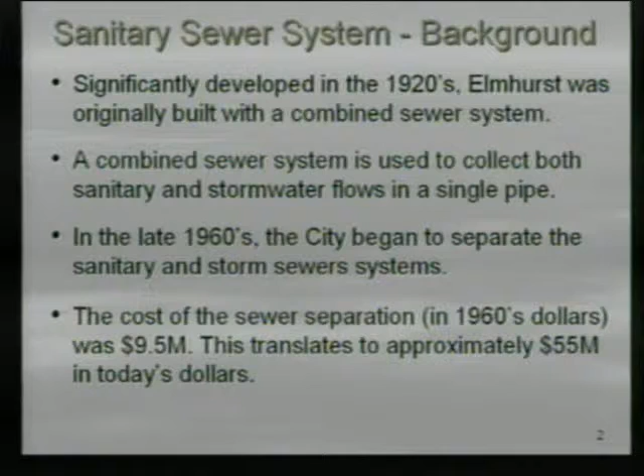Elmhurst was mostly developed back in the 1920s and was originally built with a combined sewer system, where all the sanitary flow and all the storm flow goes to the same single pipe. That's how things were constructed back then. In the late 1960s, the Clean Water Act came into being, and the real push to clean up streams and waterways started, and it became very obvious that combined sewers were problematic as they carried waste to the streams. The sewer separation the city went through in the 1960s cost approximately $9.5 million, which would be significantly more today, in today's dollars.

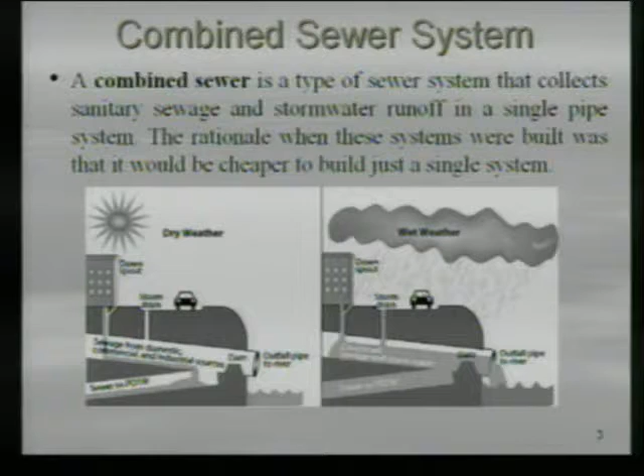Here's a picture of a combined sewer system. The picture on the left shows the system in normal flow, dry weather condition, where all the sewage from buildings in town is handled by that sewer and makes it to the water treatment plant. But when you get wet weather and the storm drains and downspouts kick in, it's too much flow for the treatment plant to handle, so there's an outfall, shown schematically here, that allows it to go straight to the creek. This single system was much cheaper to build, and that's probably what drove it in the day.

Currently, the city has a sanitary sewer system, which carries the sanitary waste away from homes and buildings, eventually to a treatment plant — the city's own municipal treatment plant. In the sketch here, you see the sanitary sewer out in the street.

It may be just one point, I'm not sure if I can point to that. This line right here is the sewer lateral — you'll hear us talk about that. That's the pipe that connects your house to the city sanitary sewer. In Elmhurst, as in most communities, the city's responsibility for maintenance ends right at the joint where your lateral comes into the city's main. The pipe from the main back to your house is the homeowner's responsibility — the homeowner owns that piece of pipe.

I sort of use the analogy that the city has a roadway network, but you've got to get your car from the garage out to the street. You have a driveway — that's sort of that connection, similar to this.

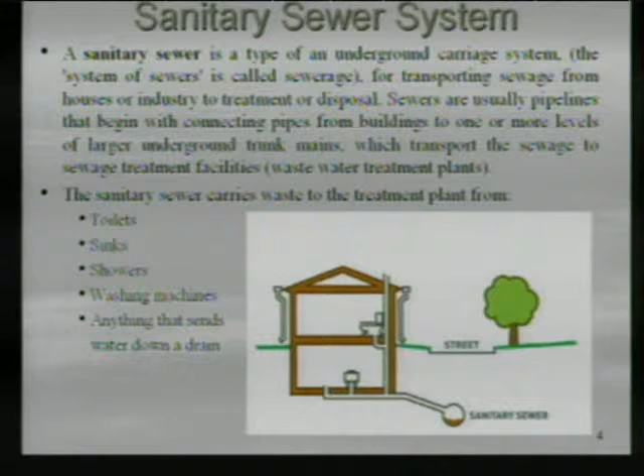A general schematic of a sanitary sewer system follows naturally. There's a small service which leaves your house and normally goes to an 8-inch sewer in the street, which may go to a larger sewer, which at some point will probably go through a lift station. Everything's flowing by gravity in the sanitary sewer system, but at some point it gets below the treatment plant and has to be lifted back up so it can continue by gravity. In this case, it goes to an interceptor and eventually to the treatment plant.

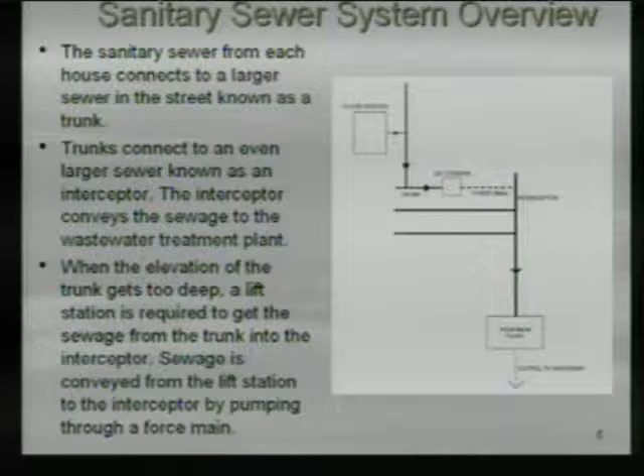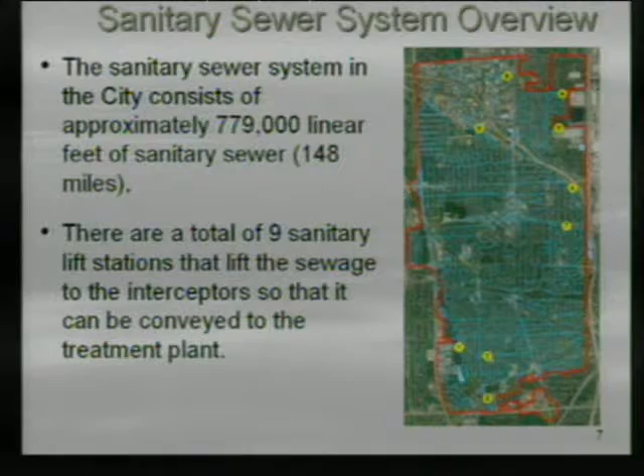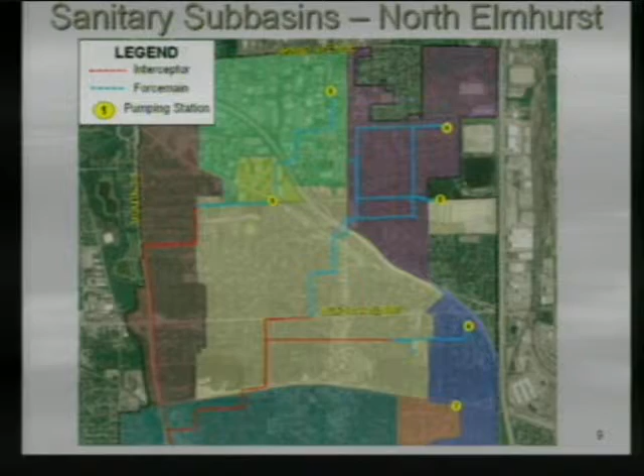Within the city, there are subbasins which drain to these different lift stations. This doesn't really identify which goes to which, but it's broken up such that certain areas go to different lift stations, and they all then go to a force main, which lifts it up one more time, and it's usually then taken by gravity to the treatment plant. These are the subbasins in North Elmhurst, and these are the subbasins in South Elmhurst.

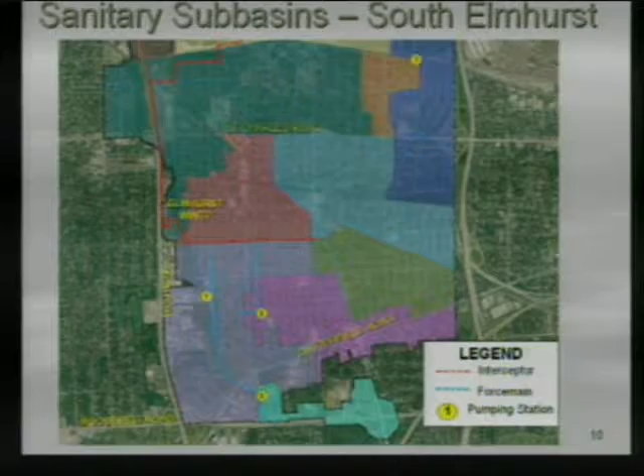With the lift stations being so far flung, the city has to keep a pulse on what's going on at each of them. To do that, the city uses what's called a Supervisory Control and Data Acquisition System, SCADA. It's located at every lift station and sends data back in a constant stream to the wastewater treatment plant, where an operator is monitoring the screens and looking for problems.

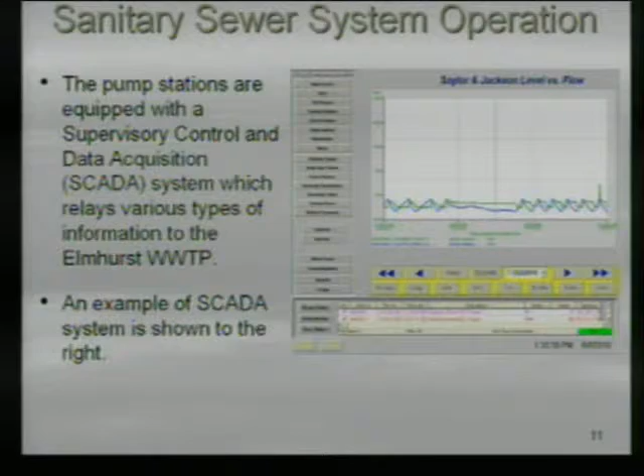Under normal operating conditions, this is what the SCADA will show: the wet well elevation, number of pumps operating, station flow, pump runtime, generator status, intrusion alarm meaning if the door opens, the PLC, or logic computer, which is running the whole show, and set points for when pumps come on and off, along with what those elevations are. If there's a failure or an alarm at any of the stations, it immediately rings back on this screen at the wastewater treatment plant where the operator is.

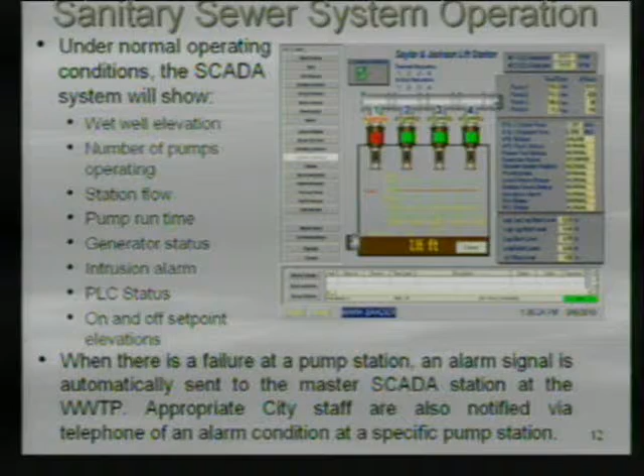Here's an example of when pumps are taken out of service for maintenance or whatever. The operator will see a screen showing them turned off and X'd out as out of service. Other alarms that come in include power failure, generator running, high water, and intrusion, so that we know if something isn't quite right at the lift stations. Again, they're all over the city, so this is the only way to monitor them.

We're going to focus pretty heavily tonight on inflow and infiltration. Probably by now everyone's heard those terms, but we'll go through them again. They're terms used to describe clean water or groundwater that gets into the sanitary sewer system.

As we'll see a little bit later, sanitary sewer systems are designed to carry sanitary flow, not rainwater. So when clear water gets in, it's a problem. The sanitary system is designed for toilets, sinks, bathtubs, and showers, and the clean water that gets in is problematic for the system's capacity.

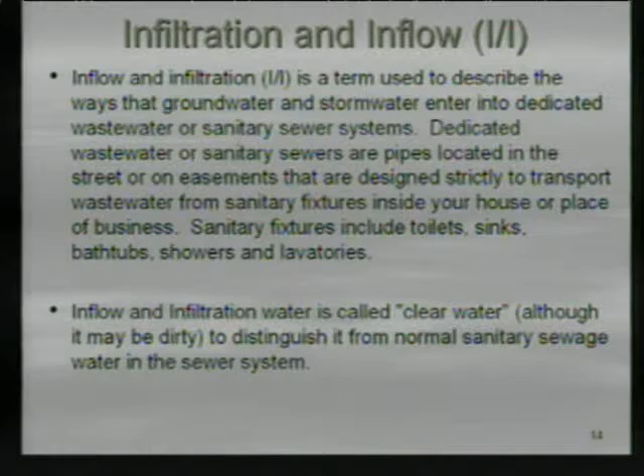Here's the definition of inflow. It's basically water that is flowing into the sanitary sewer system by a connection. It could be a footing drain, could be a roof drain, could be window wells, and it could certainly be sump pumps.

Most of these sources, it's illegal for them to be connected to the system by today's current code. So all of these things could not be draining into the sanitary system in a house that's built today.

Obviously, as the last bullet says, the preferred route is that stormwater is pumped outside and either goes to the storm sewer or gets infiltrated into the ground.

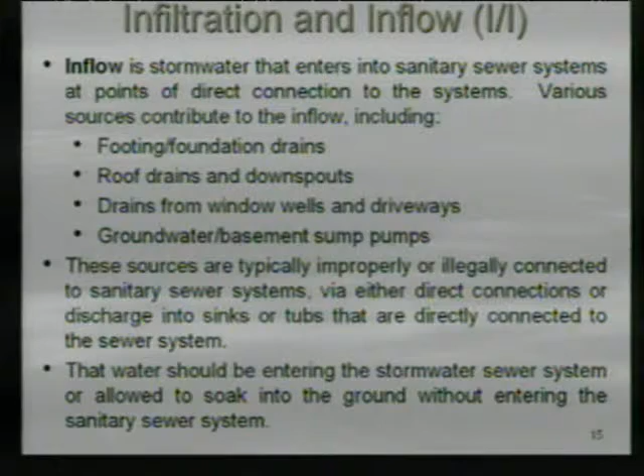Infiltration is water that comes in through cracks and leaks in the sanitary sewer pipes. Again, we have 148 miles, most of that sewer is 6 foot in length pieces. A lot of it is vitrified clay pipe. Some of it is greater than 50 to 80 years old. So there are cracks, there are open joints, and the water will infiltrate in through those cracks and joints.

The bottom bullet says that often sanitary sewer system pipes, along with the lateral pipes attached to houses and businesses, have gone much longer without inspection or repair. The city does TV and maintain its sanitary sewers, which we will see, but very few private lines have ever been inspected or checked, so we don't really know what kind of condition they are in, but they're as old as your house, and if your house is pre-1970, there's a good chance it's clay tile as well.

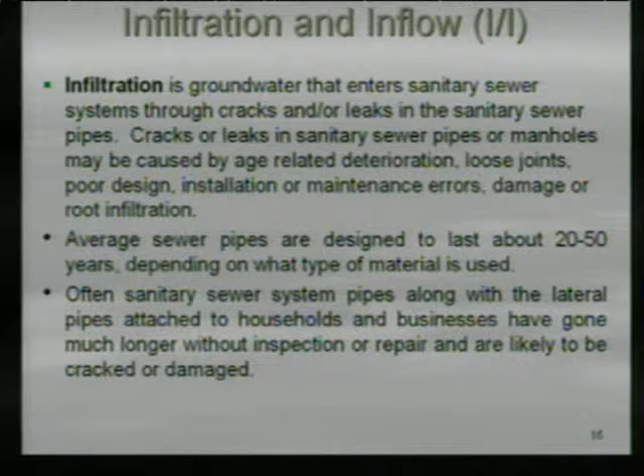Here's a schematic of sources of infiltration and inflow. Starting at the top, you see a roof drain connected. The city doesn't have that problem too much anymore, but here you have a footing drain that is connected directly in, and that is a problem we do have.

I would call that inflow, but some of these other sources of broken sewer -- this is that lateral again that we talked about. You could have a broken piece of pipe on that. You could have an uncapped clean out, not something we see too often, where your pipe comes into the city sewer. Sometimes that connection will leak.

Here you've got just a crack in the city sanitary sewer system. Here's a crack in a manhole. The old lids used to have big holes in them, just like a regular lid. Now we have what's called concealed pick holes, much smaller. Keeps the vast majority of water out.

On the storm side, it could be a cross connection from a storm inlet, or even a cross connection from a storm sewer. We look for those constantly. We would love to find those. We're always checking, and we don't find many. If we find one, we immediately disconnect it, but we don't find too many, unfortunately. That would be a large source of I&I that we could easily remove from the system, but we don't find too many of those.

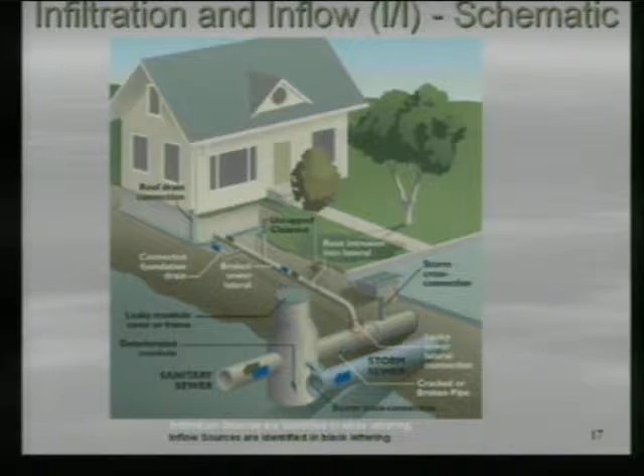When we get in these situations where we have inflow and infiltration, I&I, it causes us problems at the lift stations, because the lift stations are sized to handle sanitary flow, and now we have a lot of clean water coming in.

Here you see -- oops, gosh darn it -- right there is the sanitary lift station located on Saylor. It pumps all the way up Saylor to McKinley, and then it's again been lifted, so now it can go by gravity to the treatment plant.

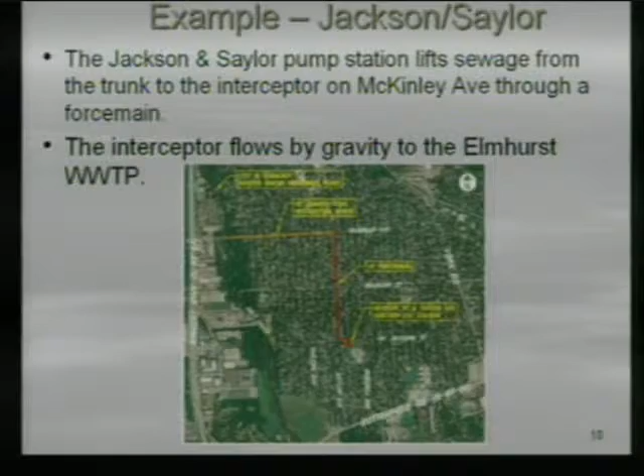In a normal day's flow, when sanitary flow is coming into the wet well, it's kind of like your sump pump, a really huge sump pump. It fills, it fills, it fills, and then it kicks on. Sometimes the pumps keep running if they're timed just right, but basically all day long, every shower, every dishwasher, every washing machine is going into that wet well, and then the pumps kick on and send it up Saylor to the gravity sewer at McKinley, and then it flows onto the treatment plant.

When it starts raining and that infiltration and inflow starts coming in, it comes into that wet well really, really fast. At Jackson and Saylor, we do have a bypass which we can open, and we can pump additional sewage to a storm sewer, which is not an ideal situation, but it's better there than in someone's basement. So we operate that, we send it that way, and that goes through a 24-inch force main that connects to a sewer on Hillside.

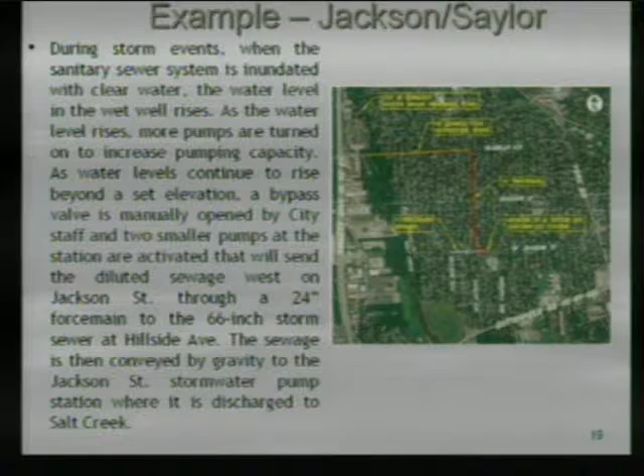So we are able to man that and operate that. We're currently in the process of making those valves, which we currently have to open and shut manually, able to be done remotely. But again, that's what happens when we start getting the rain and we start getting the inflow.

This is something we put on recently. There was some confusion at Saylor and Jackson as to whether the pumps were running in different events, so we decided it would be better to communicate. People were thinking they weren't hearing the pumps, but the pumps at Saylor and Jackson are 20 feet down, submersible pumps in a wet well, so you don't hear them even standing right there. What people do hear is the generator, a large engine. So in this case it looks like the pump-on light is on, but if you were there, you wouldn't really hear anything.

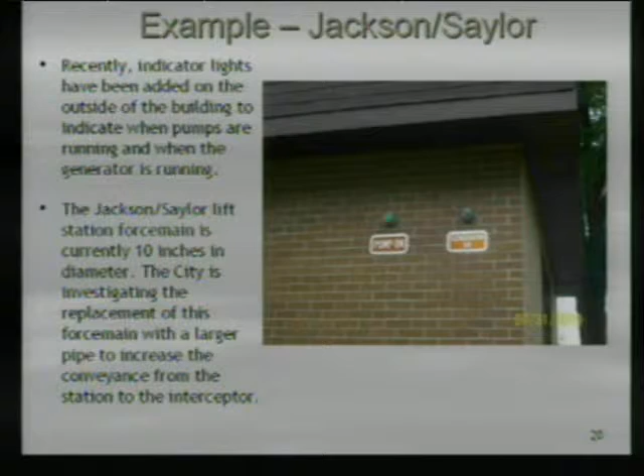This force main goes up to McKinley, and it has been programmed for replacement just for maintenance. We're currently looking at increasing the size to see if we could pump more out of there on a normal basis.

Here's a schematic of a connection of a sanitary sewer. Originally, since the combined sewers were both, when the new separated sewers went in, they laid them as storm sewers because everyone was already tied into the other one. So for 95% of the sewers that went in, the old sewer stayed sanitary, and the new sewer, probably reinforced concrete pipe, became the storm sewer. So these older homes that were connected stayed connected. You can see here you have all your sanitary coming in, your toilets and wash tubs, but you also have a footing drain tied in, so as it starts to rain, you're getting that flow into the sanitary sewer system as well.

The city did go through and do a sump pump disconnect program back in the 90s, where every home in town was visited and required to take their sump pump, if tied into the sanitary, and kick it outside. In addition, we also did downspout disconnects, and every downspout in the city was disconnected. I'm surprised when I drive around other towns how many still have them - house after house just going right into the ground, and all that water is going right to their sanitary system and taxing it.

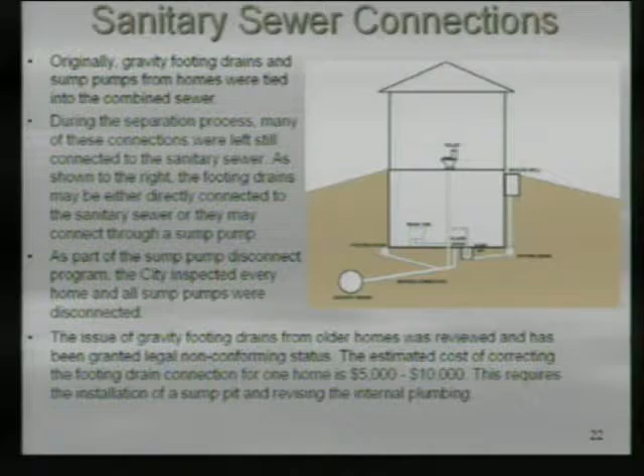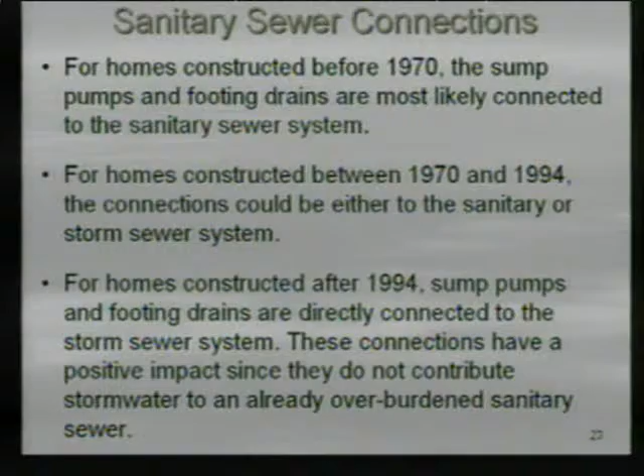For homes constructed within Elmhurst, when you look at the age of homes, those built before approximately 1970 are probably tied to the sanitary system because there were no storm sewers. Between 1970 and 1994, we don't really know for sure which they might have been tied to - it was kind of a period where it wasn't real clear. But we know after 1994, any new home constructed has the sump pump discharging outside and not tied into the sanitary system. We'd point out that homes constructed before 1970 had the sump pump connected to the sanitary at that time, and the footing drains were most likely connected to the sanitary as well.

Elmhurst has gone backwards and said downspouts have to be disconnected, and sump pumps, if you've got one, have to be disconnected from the sanitary sewer. So even if a home was built before 1970, if it had a sump pump originally connected to the combined sewer, now the sanitary, that sump pump will have been disconnected.

But if there's not a sump pump, if it's just a gravity foundation drain, those gravity foundation drains are still in place and connected to the old combined sewer that's now the sanitary, as noted. And that's clearly the largest source of inflow resulting in the problems we're all experiencing. All right, thanks Tom, that's good clarification.

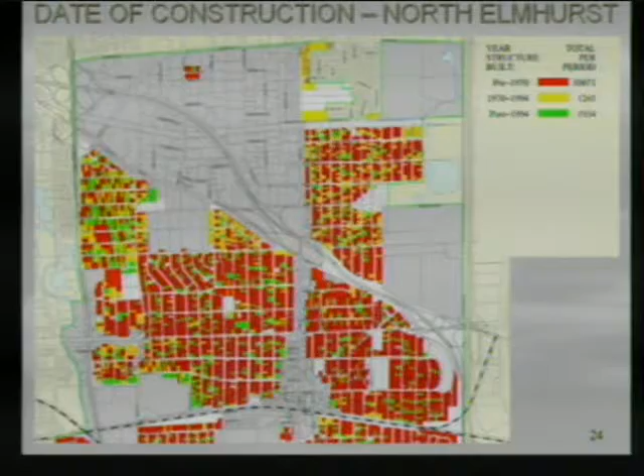Here's a map of those three periods: pre-1970, 70 to 94, and post-1994 homes in town. I've got the south half coming up next. This is the north half of Elmhurst, and you can see there's quite a bit of pre-1970 homes. Those numbers on the right are for the whole town, so the bottom half has the same numbers, but that's roughly 10,000 pre-1970 homes, a large percentage of which probably have gravity footing drains, and that's where the water's all coming from.

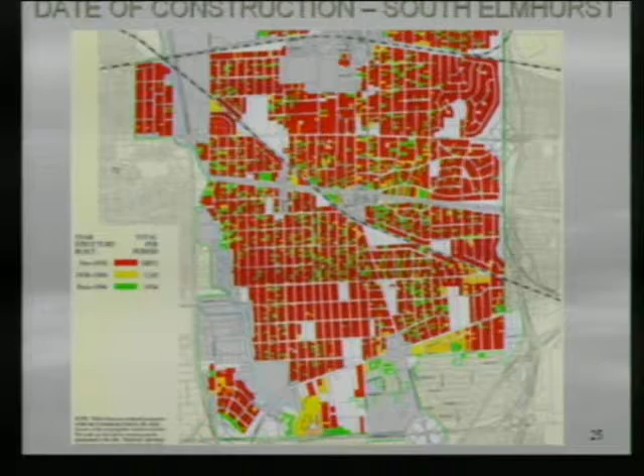That immediately becomes a problem and overtaxes the sewer system, the sanitary system, in a rain event.

Sanitary sewer design is generally based on how many people are going to be using that sanitary sewer. They're designed to convey 100 gallons per day per person, which we call a population equivalent. So depending on how many homes you have, that tells you, if you were building a new subdivision, how large your sewer has to be. They're designed to have a velocity that keeps the speed up to help be self-cleaning. They're vitrified clay or plastic, so they have very low coefficients of friction on the inside.

So here you see an 8-inch sewer will take approximately 500 homes with 3.5 people per house. So an 8-inch sanitary sewer is a large sewer. It's got plenty of capacity.

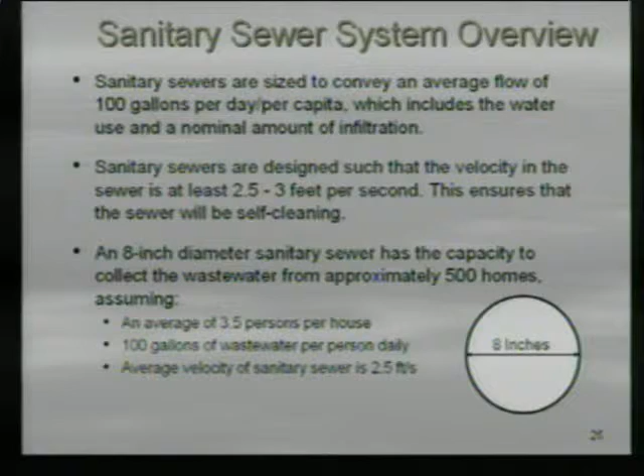The problem is when we don't carry only sanitary and we start carrying clean water. A half horsepower sump pump with a 1.5 inch discharge line will do 60 gallons a minute. If you do the math, it only takes 7 of these pumps to exceed that 8-inch capacity. So if you have a block with 20 or 30 homes and half of them are tied in or somehow connected, then you've got problems.

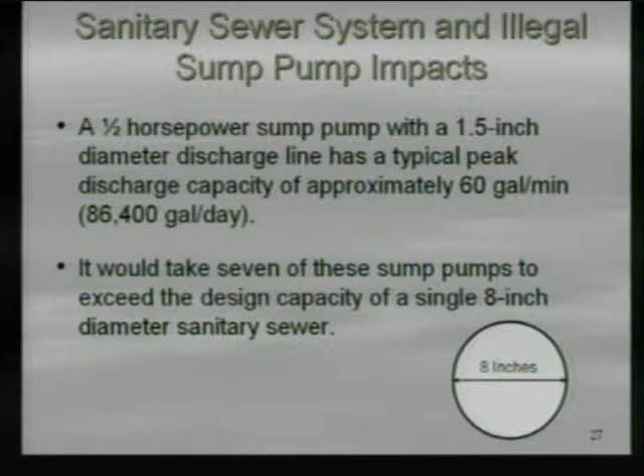When that water gets into the sanitary sewer system, it puts that sanitary sewer under pressure. It creates what we call a hydraulic gradient, a pressure line in that pipe. The science calls it a piezometer, but if you could take a straw and put it in that pipe, you would see how much pressure was in that water. That dirty water would come up that pipe to a certain height, which is the same height it's going up the lateral and up the floor drain into the house. So that pressure in the pipe is what's causing it to go backwards up laterals.

And if you don't have an overhead sewer, then this is the situation we end up with, which we had a lot of this summer.

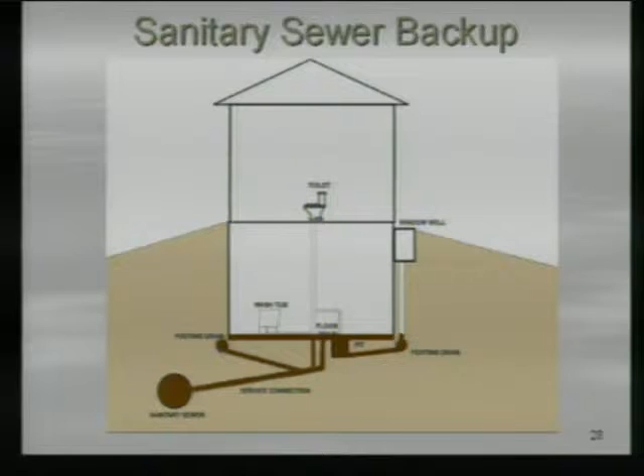The city has taken on numerous projects over the years to reduce I&I on the public portion of the sanitary sewer system. We did sump pump disconnects and downspout disconnects back in the late 80s, early 90s. We utilized smoke testing to identify any area drains, and those were removed. We line our sanitary sewers at about $900,000 a year. We've gone through and did gunite and sealing of all the manholes back in the 90s, and they all got new covers. The city also has the overhead sewer program, which is a very effective program because it's doing two things.

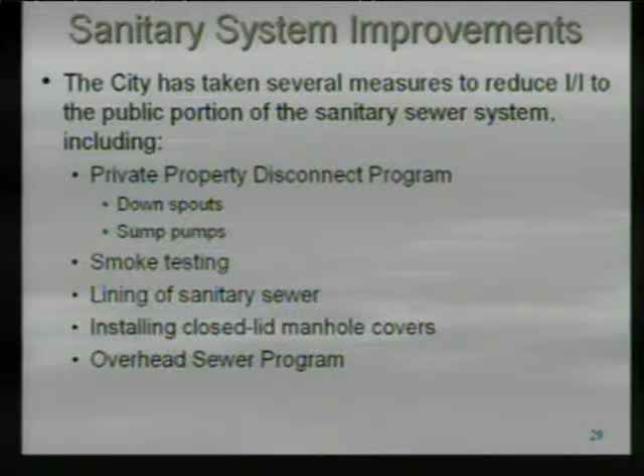It's getting the clean water that's coming from that house out of the sanitary sewer system, and it's not allowing the sanitary sewer to back up into that basement.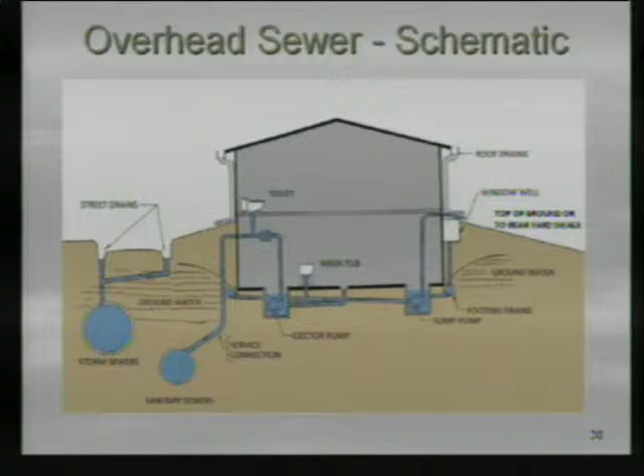This elevation here and the check valve is what protects that flow from coming back up. If this floor drain was connected straight to the sanitary and this goes under pressure, instead of just getting this high, it would have to get up above the street. So that's where the protection comes from, combined with a check valve in the overhead sewer protection system.

A little history: the overhead sewer system program was created in 1997 with a $3,000 reimbursement, which has been upped recently by the city council to $5,000. We only did 15 prior to 2009. In 2009 we did 14. We were budgeting, I think, $15,000 a year.

Then in January through May of this year, we did 11, and the city council had increased that budget to $50,000. After the June and July events, the city council bumped that up another $450,000. We have almost 100 on the list. 38 have applied for funding. We've processed 12 of those, and there's another 61 going through the process.

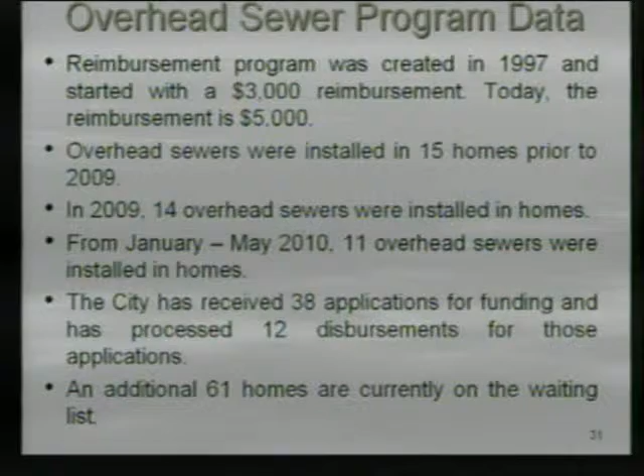Again, this is just to differentiate generally. This is a slide on the City of Elmhurst's shared overhead sewer installation program, where the city pays half the cost, originally not to exceed a total cost of $6,000, half the cost being $3,000. Now half the cost not to exceed a $10,000 project cost, or a $5,000 city expenditure.

The city, since I think it was 1993, clearly has a code that requires overhead sewers to be installed with new homes. So homes built after 1993 have an overhead sewer system, but they were all paid for by the owner of that house, originally paid for by the builder, and then the owner paid for it. So there are a lot of overhead sewers in the city that are protected, but the city's program of financial support is limited to what's shown on that slide.

There's a lot more interest recently than in the past, but there was a lot of interest even prior to that. I actually got an update today on the program, and our average reimbursement right now is $4,100. So that's what we're running at.

Another large program the city does, and has been doing for 20 years, is sanitary sewer lining. As I said earlier, sanitary sewer pipes are largely vitrified clay pipe, the same material as that orange pot you have flowers out in your garden. So it does crack, and it could eventually collapse.

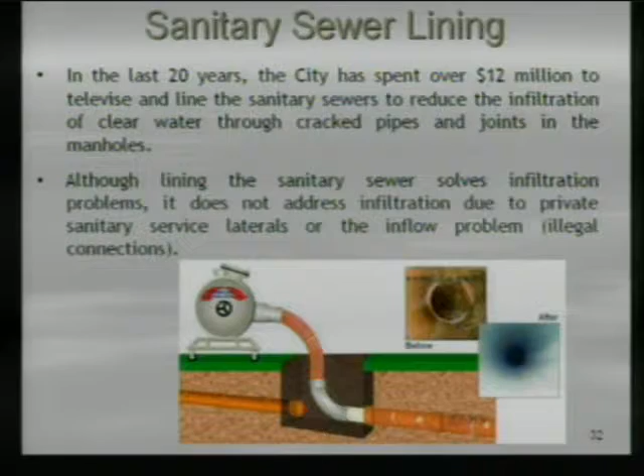You can't really see it, but I have a couple of little samples. I can do a little show and tell for the council, but this is what the bag looks like when it goes in. It gets inverted into the line, and eventually once it's cured, it's watertight and it's got structural strength, so we're gaining two ways: we're reinforcing the strength of the sewer, and we're eliminating infiltration through the cracks and joints, because this goes from manhole to manhole.

So normally you'd have a joint every 4 to 6 feet, but with this you have no joints from manhole to manhole. Any direct inflow pipe would be identified with that program, because pipes connected to the main line have to be cut open, and if they're not cut open, they're disconnected. So all of the sewers that have been slip-lined, the city is quite reasonably sure all inflow connections have been disconnected, if they weren't first found and identified and corrected with the smoke testing program.

It's a good point, Tom, because normally after that bag goes in and once it's cured, if it's happened on your street, you get a notice that says you won't be able to use your toilets for a little while. We actually have to come back and cut out a cookie, where when the bag gets pushed in, you can kind of see a little indentation where it's pushed against a connection, so they cut that out.

But before we even get that far, the line is TV'd. Any potential collapses or partial collapses that would keep the liner from going in are dug up and fixed. That's what we call a point repair. Then the liner goes in, it gets cured, and when it's all done, the laterals get connected.

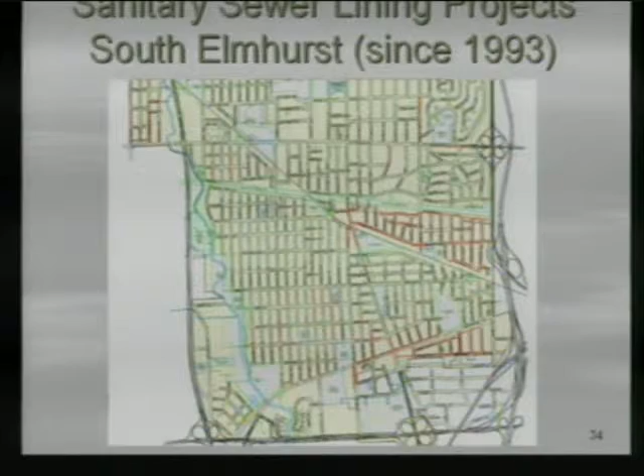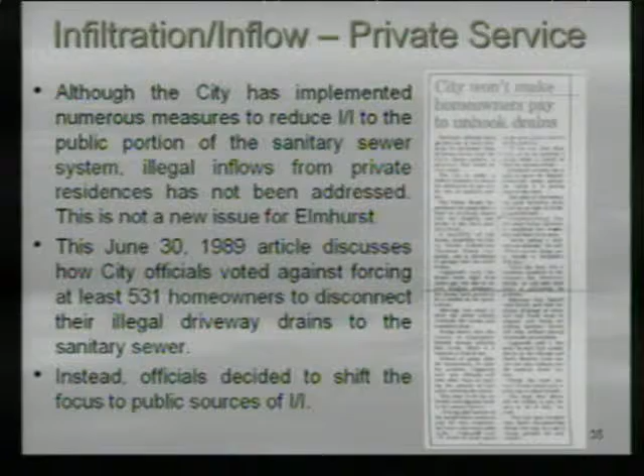Here is an article from 1989. The city has done a lot to reduce I&I on the public side of the infrastructure and continues to do that. In the aftermath of the '87 flood, there were discussions about whether we should force people to disconnect their driveway drains and footing drains, and as you can see here, the city council voted to make those legal non-conforming and left those in place.

Then in 1989, the city approved $500,000 to repair some of the cross connections that existed between the sanitary and storm sewer. At the same meeting, it came up again about disconnecting residential driveway drains, those downslope driveways which obviously bring clean water right into the sanitary system. Again, it was decided they were going to be grandfathered in, so it wasn't removed at the time.

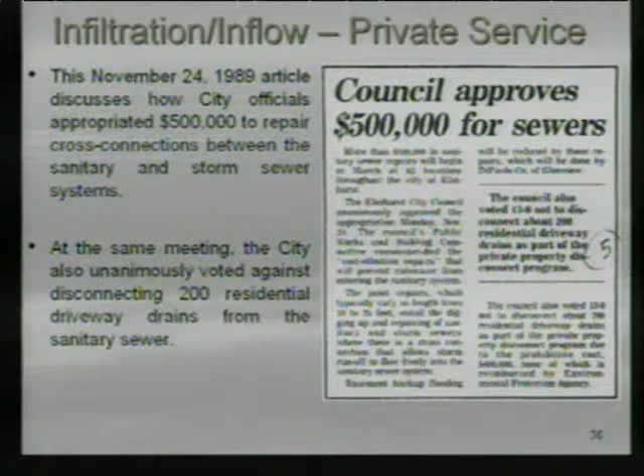So we've got a combination of public-private infrastructure that makes up the whole sanitary sewer system. The big problem is I&I, and the city's made big strides on reducing I&I on the public side. How we best do that going forward on the private side is something we expect would be analyzed, with alternatives put forward, coming out of the comprehensive plan.

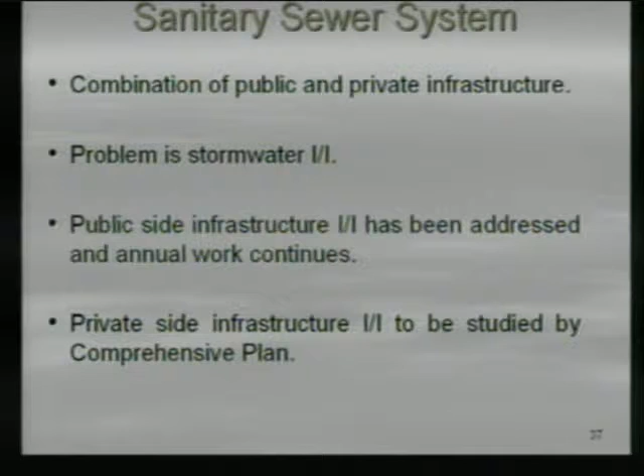Appreciate your education on the sanitary system. Not the fun system, but it is what it is, right? So, any questions or discussion?

Alderman Mulliner. Excellent job, but I have a whole series of questions. So let's start, I probably got about 10 or 15 questions I kind of want to go through.

Slide 5, you talked about this, we've talked about it a number of times, the connections with the foundation drains, indicating that there's a significant percent of the water that goes into the sanitary sewers from that. Do we have any idea what percent of water goes into that?

Those foundation drains, I'm assuming those are the traditional foundation tiles. Are all of those still intact, or have most of those collapsed? Is there any way to know that? Well, if you're having real seepage problems, you may have a collapse. If you're not having problems, it's probably still working. Those tiles that are laid were generally laid in some stone bed, so even if a pipe is collapsed or broken, the water may still be able to move through the stone and get out eventually.

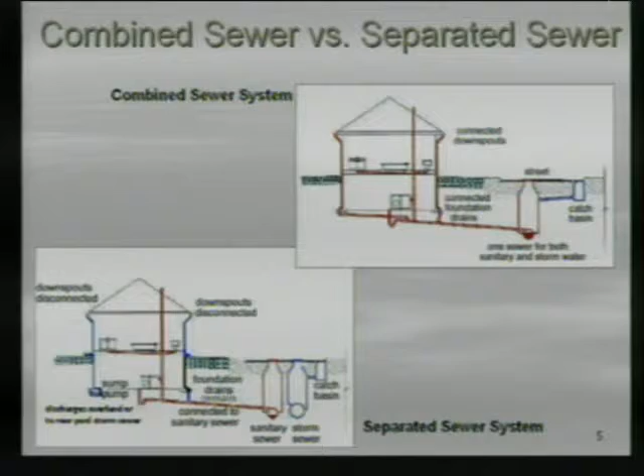So if you're looking for one of the solutions, it's to disconnect these and connect them to the other sewer system. That would be a logical thing to do in order to eliminate a lot of the water going into the system. Correct.

On slide 8, this goes to the pumping stations. How often are those backup generators run?

Okay, the diesel fuel, I assume, is changed out periodically or run to the point where it's run down? What about the one that's at...

McMaster-Carr? Do we maintain that? I know it's maintained by them, but do we actually check to make sure that they're doing what they're supposed to with that one, or do we just assume that they're doing it?

I think that's totally theirs, but it also only services their campus. Okay, so if they don't do it right, they have the problem, it's not ours. It used to be the city's prior to Romans Road being vacated and all that, but once they took over everything, they got that too.

Okay, you've got a couple of them that are indicated here with portable generators. Plans to upgrade those or put regular generators at each one of those? Do you have any long-term plans to replace the generators at those? I don't believe we have any plans right now, but again, could be something looked at in the comprehensive plan going forward.

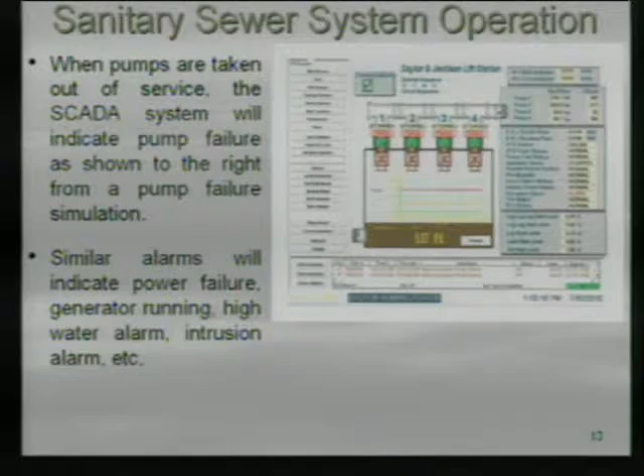I'm curious as to when you do the maintenance on them, I'm assuming that you don't take all of the pumps out at one of the lift stations at one time. You only take one at a time out. It would be sequenced depending on what had to happen, right?

Okay, are all the lift stations similar to the one lift station that we've talked a lot about where they have 4 pumps in them, or is each one slightly different? I would say each one's slightly different. They're different sizes for the amount of flow that's coming into them and how far they're pumping it, how high they're pumping it, so they're all different.

On slide 17, one of the comments that you made was that there's a number of these crossovers between the storm sewer system and the sanitary sewer system, and you said when you find them, we take them out. We don't know where any of the remaining ones are. We're just finding them as we go along.

Well, that's what I was saying. We haven't really found any. We always hope, we would almost like to find them because then you've got a real source of inflow. But over the years, they've been bumped into.

The sewers have been TV'd. As Tom said, when we TV'd a sanitary sewer, we see every pipe coming into it, and we've done 35 miles, and I don't know that we've bumped into hardly any.

Yeah, and initially, after the sewers were separated, the city went through a program, before my time in this capacity and even in public works, but as an engineer, the city was smoke testing the entire sanitary sewer system, checking for any downspouts that were still connected from houses, and then checking and seeing any smoke coming out of a stormwater inlet curb connection at the street, that indicated that inlet was connected to the sanitary, or the downspout was still connected to the sanitary, and then that appropriate disconnection was made, be it on the private property side of a downspout or any direct drain connected to the sanitary.

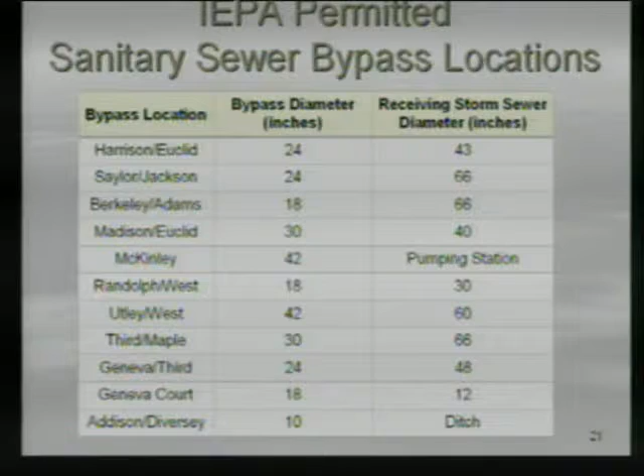Hard to say exactly, but take what happened on July 23rd - it was pumping down to Harrison, which was already underwater. Was it making it worse? Could you measure how much higher or lower it would have been without that? It's hard to say, but all that water was potentially heading to basements. So as bad as that is, it's not as bad as the other choice. It taxes the storm sewer in a more normal situation, but in all these cases we're trying to get sanitary and storm separated. It's better to take it out of the sanitary, even though you may have a negative impact on the storm.

Okay, so we're back to the I&I issue is what we're back to. We've got to get the water out of the sanitary sewer system.

One of the other questions I have relates to what we just saw - you passed around the sewer lining, and I ask this question all the time because I think this is one of the things we keep missing. I think the drains around the basements are probably one of the issues, but I still think the laterals are another big issue. There's a lot of houses out there with old clay pipe that are collapsing or have roots going into them. I'm sure most people with a house in town can tell you how many times they've had their sewer rooted out to get it cleaned, and it's primarily roots getting into it.

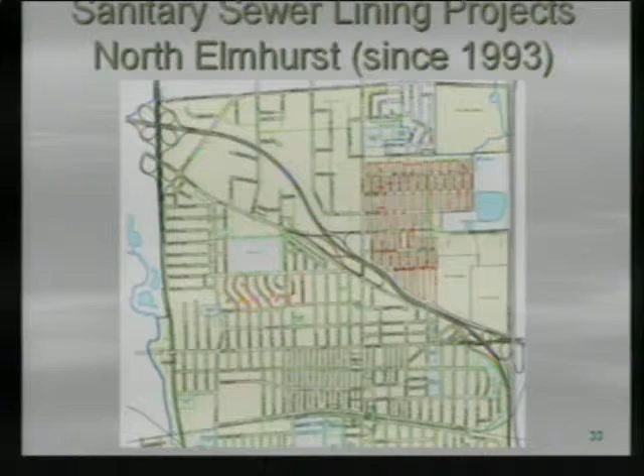I wanted to dovetail off of that because I thought we had at least something in place for the laterals. My one question is on slide 33, and not particularly about that slide, but the sanitary sewer lining. Obviously the northeast section has already been completed, and other sections within town have also been completed. Do we have any data prior to and after the lining has been done for each of those impacted sanitary lift stations to see how much this lining has helped any potential I&I? Because from what I believe, the sewer lining at a bare minimum resolves at least all the infiltration from the sewer itself, and then some of the inflow. So do we have any of that statistics?

I don't know off the top of my head, but I can check with our staff out there. Dennis did checking beforehand, but now that we've really just completed that whole Northeast Elmhurst last year, maybe 2 years ago, '06, we probably could run that again if it hasn't been done.

I think some of those facts, not only the northeast section but any of the areas that have been completed and those impacted lift stations, it would be interesting to see what the flow is at those lift stations before and after the fact. The only problem with that is that it's storm dependent. Understood. If you had the same storm before and after, it'd be easier to check, but we can certainly do some looking.

Very good. Any other questions, discussion? Anybody? Okay, very good.

Just one quick question for Mike. Mr. Kennedy, Mr. Chairman, thank you sir. On slide 8, Mike, real quick, you have the pump stations and the backup power. For each of those stations, how many do we have multiple electrical feeds for? I know Saylor and Jackson we have 2 electrical feeds, an east and a west, and both those got knocked out in June.

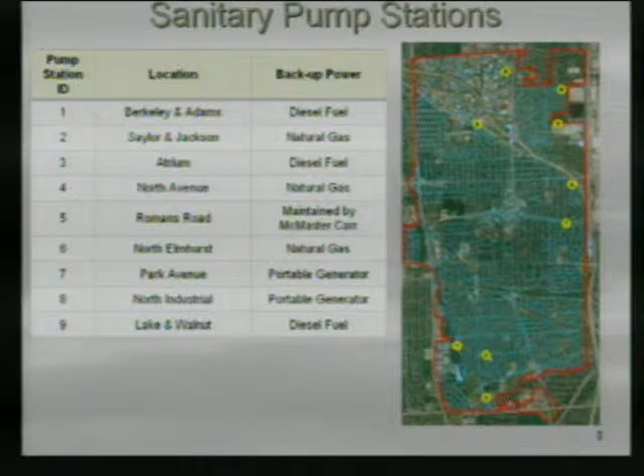Before I ask for a motion to adjourn, we had a unique situation where one of our aldermen was elected to state representative, and Alderman Nybo has put his resignation in for our council. This is actually his last meeting, and it's been a privilege and an honor to serve with Alderman Nybo, and we wish him the best. He's going to be a great voice for Elmhurst down in Springfield. God knows we need the help down there. And Alderman Nybo wanted to say a few words.

Again, no questions from the task force first, before? No questions at all? Did you want to have any task force questions? Well, do that afterwards, pardon me? Yeah, we are going to meet with the task force after this, so I would encourage, if we have questions, City Manager Borchardt and myself will meet with the task force to talk about expectations and what's going to be happening over the next month or so, and also what's going to happen after the first of the year as well. So if you do have specific questions, we can address those at that time, if that's okay. Okay, and this way we can get the committees going and also see a fine man off.

Well, thank you, I didn't want to take up too much time, Mr. Mayor, because I know we're busy tonight. And I guess after tonight my resignation will be effective. I suppose my timing could have been better, at the risk of someone saying that after 3.5 years of working with everybody up here, we ended up in the sewer.